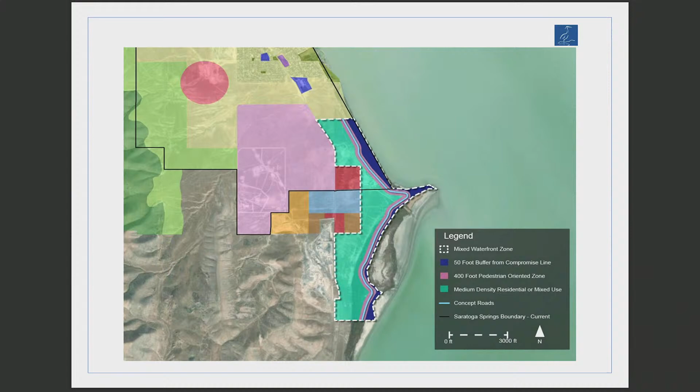So there's already a project that is kind of — but they came in before these new standards, yeah. This is not the design standard, this is a change. But they have the commercial on the bottom and residential on top, which they met. Yeah, a lot of what they've done with the trails and the connections and incorporating the waterfront into the design — that's what we're after, and they did do a lot of that. The architecture on that building is a little different than what you'll see in this document. It's what we're trying to aim for, so. Okay.

So let's see here. Basically, some of the important characteristics are: we want to include neighborhood services, social gathering spaces, attractive landscaping, convenient public access to lakeshore areas, and a sense of personal safety, well-maintained housing, and attractive parks. On this slide here at the bottom, I wish we could zoom in on that — or maybe we can. Probably can, yeah.

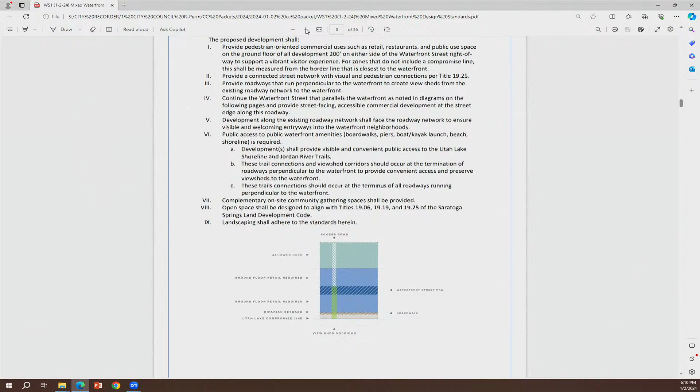That image gives you a good visual of what we're saying in all these words in this document. I'm a more visual person, so when I see an image like this, it's easier for me to understand.

The dark blue line in the middle is the waterfront street right-of-way, so that would be a road running through the development. Then the medium blue that sandwiches that dark blue is the required retail areas, so we'd want retail space along that road.

On the main road. And as you get closer, on the bottom of the screen, that's the waterfront. We envision some kind of a boardwalk, the lake shoreline, and then the riparian setback, which is the area we have to preserve along the waterfronts.

Up on the top of the image, that lighter blue or teal color, those are the allowed uses, so that would probably have housing or whatever in those areas. But the idea is we want to focus the commercial along a main artery and then have connections to the waterfront on the other side of that main artery.

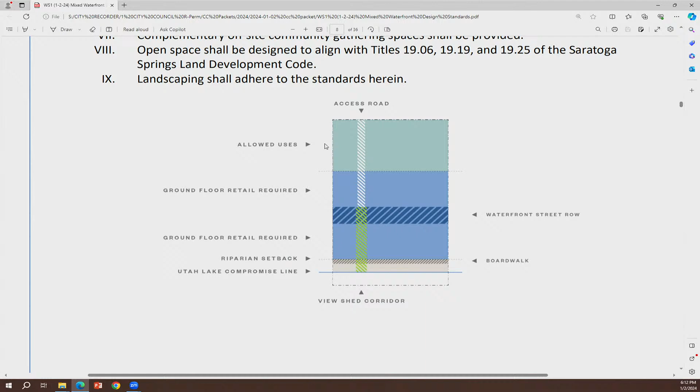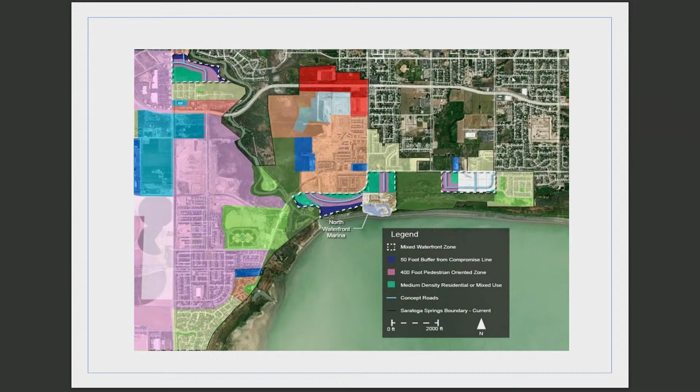Can we zoom back out again? One of the things, I don't know if we want to talk about it tonight or maybe just have it be something to think about. You can kind of see here in the middle of the screen, maybe we can zoom in, is we've kind of shown what the waterfront would look like.

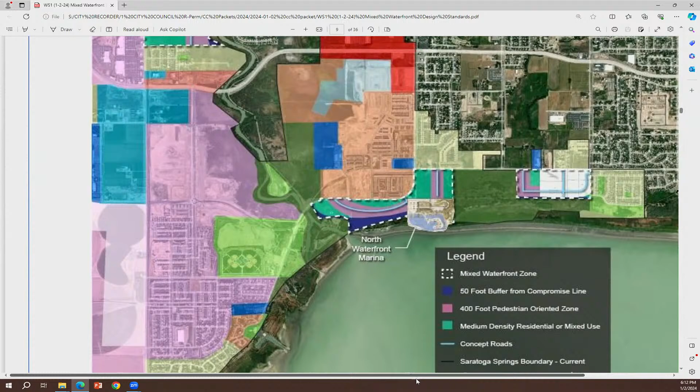This area is adjacent to the North Marina. So we want to plan, because that's what planners do, and we want to make sure that the marina integrates well with the mixed waterfront area. I wanted to show it to the council because we need some direction.

Do we want to have the marina completely separated from this zone? Do we want to try to integrate them? And if so, in what way does the council see us doing that? I personally would like to see the marina integrated into these two adjacent mixed waterfront zones. I'd like to see those zones support the marina use.

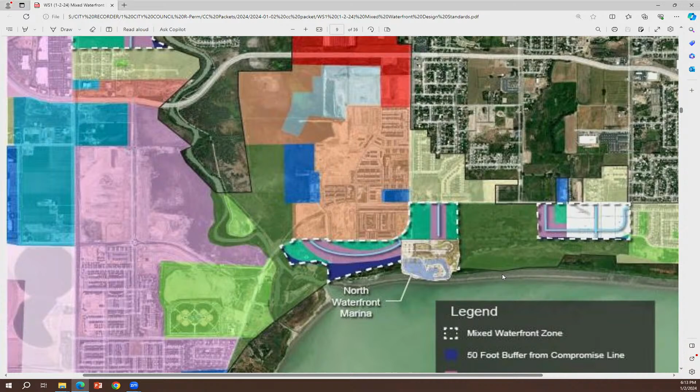One of the concerns we probably need to consider is that if we're integrating it, that's one thing, but if the developer is trying to count that open space for their open space requirements, it's probably not what we're looking for. So integrating it, I understand, but we want the policy very clearly set by the council as to whether or not they can then claim, hey, the city has a trail along the river, or the city's already built open space here.

We don't want that. So we need to be very cautious about the integration and how that works. Their application probably needs to stand on its own without counting city property for any of its requirements.

The other thing that's not addressed in this, and I appreciate Austin and what the planning team is working on, is we probably need to tweak some of the other waterfront policies as we're adopting this and integrating it in, so we can address some of the concerns that happened with some of our last mixed waterfront developments, so those issues are resolved prior to us having to work through it during the development process. So those are some changes we'd also be wanting to bring back along with this as we look at those code amendments and things of that nature.

So not integrated, but complementary. I wouldn't want our marina to be part of the mixed waterfront zone because we're not going to be meeting the requirements, we won't have the commercial that's necessary, and we're not going to be meeting maybe even some of the design standards. I really would like to just see it be, we have that civic zone now, just leave it there, and then it's not included in the waterfront, because obviously it's very waterfront friendly.

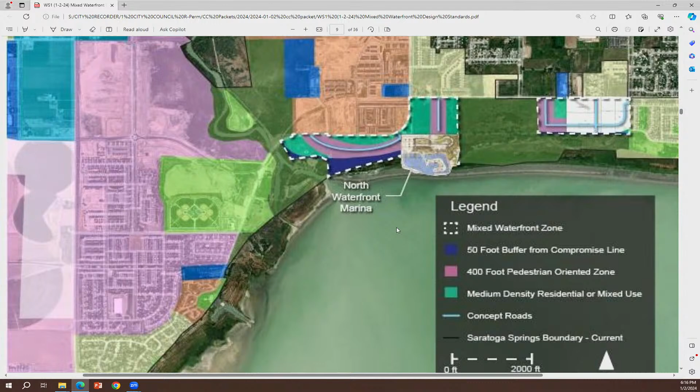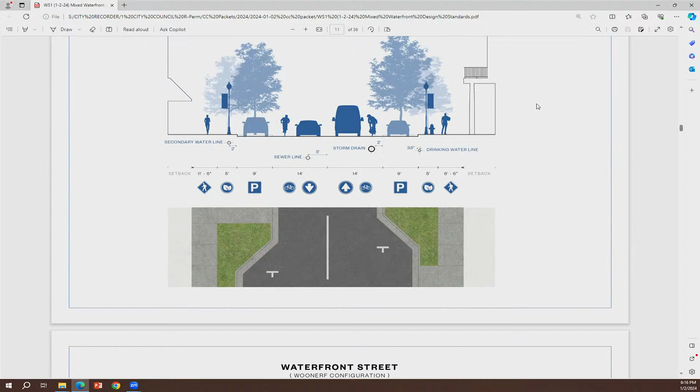On the second slide here, we have an alternative configuration. We do need to update this image, as it's showing pavers there. We actually don't want pavers. We're not envisioning that; that would be a lot of maintenance. So that image does need to be updated.

But this image is different. The way it differs from the other one is this one has curb and gutter, whereas this one is flatter, so someone could naturally cross. It'd make it more pedestrian friendly. It does have on-street parking, integrated, shown in that dark gray box there, a separate colored paver.

Those dark brown ones. Or the dark brown, sorry, yeah, I meant the dark brown. Yeah. I apologize. That's okay.

So the idea is, let's say someone with a stroller, they could just roll it right across. They don't have to worry about hitting the curb or whatever. It creates a more pedestrian flowing environment. And so those are the street cross sections that we figured would work well in the mixed waterfront zone.

Did you take into consideration on those pedestrian ones where you're putting cement flower boxes and stuff that protects people at crosswalks? Even though you can still cross anywhere, just to create a visual effect, we need a standard in there that helps drivers know we're coming up on a common cross section, even though it can be crossed.

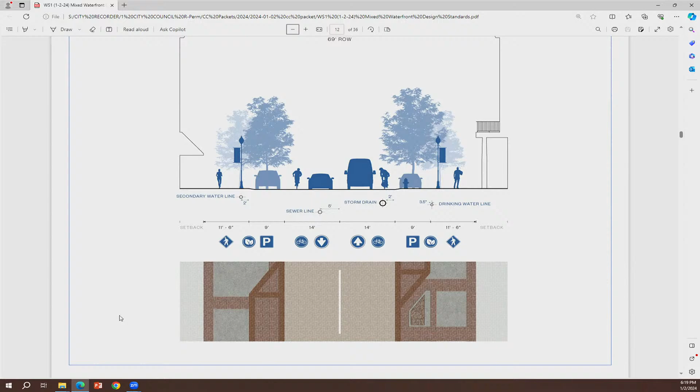Okay, all right, good feedback. And I'm taking notes of this as we go through.

Okay, so now we're getting into the meat of it here. So these are the building design standards.

One of the main focuses we wanted to have on this project was we wanted the buildings to be unique. We wanted them to feel like you're in a waterfront area. So a lot of these architectural elements, we looked at examples of other notable waterfront communities around the country.

We thought, well, what is it that makes something waterfront? That's really what we've strived for here. One of the things is we want buildings to have 3 distinct elements: a base, middle, and a cap. Kind of think of a wedding cake - you have the base, the middle part, and then the topper on top. That's what we envisioned the buildings to look like. The base would be the ground level where people are interacting.

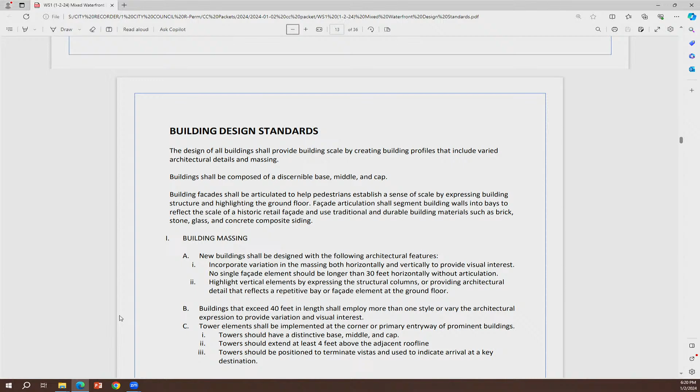You're going to have lots of visibility, 35% transparency on that base floor. Let me go to the image here so you can get an idea of what we're talking about with the 3 different elements. You can see how the top of the building, the cap, is different, and how each level is distinguished from one another - the middle is the middle, the top is the top, the bottom is the bottom, with a clear distinction between each.

You'll notice there's a lot of variation going on in the building - articulation both vertically and horizontally, using things like columns, indented windows, capstones, and things like that. Those elements help break it up, give it some variety, and keep it unique.

Did I miss it? Is it a 360 requirement, or just the facing of the waterfront? Do we require decent design on the back part, because there's the water side and then the part everyone sees - four-sided architecture? Yeah, so this would still be bound by our standard city code, which does say we have to have 4-sided architecture, though less on the back side than the front side.

Right, we haven't addressed that, but we certainly can. Because we really need this - in this situation, you have everyone coming in, so the land side needs to look nice. It can't look like the back of Smith's. I'm not trying to pick on Smith - Smith did a nice job, but it's much simpler in the back, right?

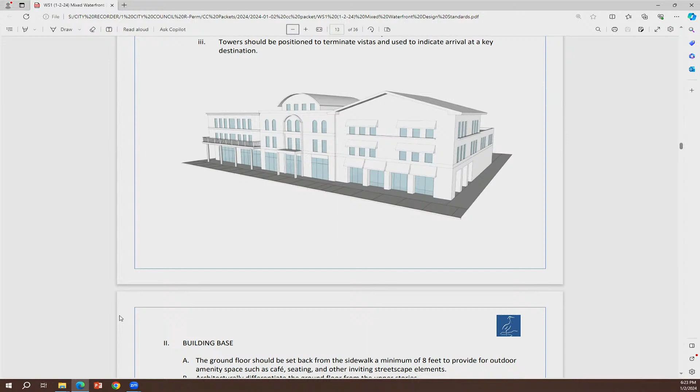At this point we haven't made that clear, so we can definitely add it. When we were creating this document, we envisioned at least 2 distinct sides - the streetscape where people are walking with shop fronts, but then as they're walking along the waterfront, that's a separate, unique area that also deserves as much attention, since you're walking from the street to the boardwalk. So really all 4 sides need it.

Yeah, absolutely. Okay, so that gets you the building base. You'll want to upgrade your images too, because if you look at them, you have awnings and things on one side, and then look at the other side of the building. That's a great point, thank you. Yeah, we've been updating these images several times already, so this will give us an opportunity.

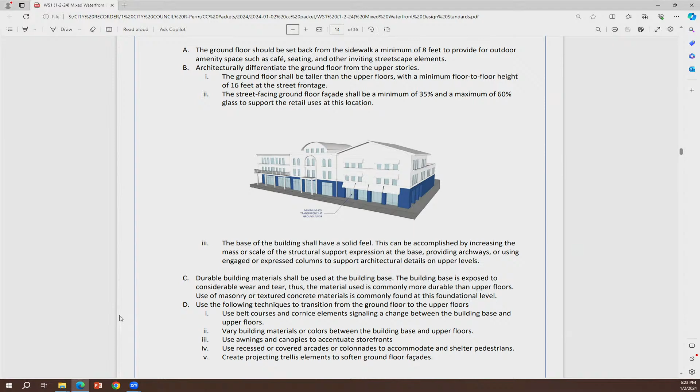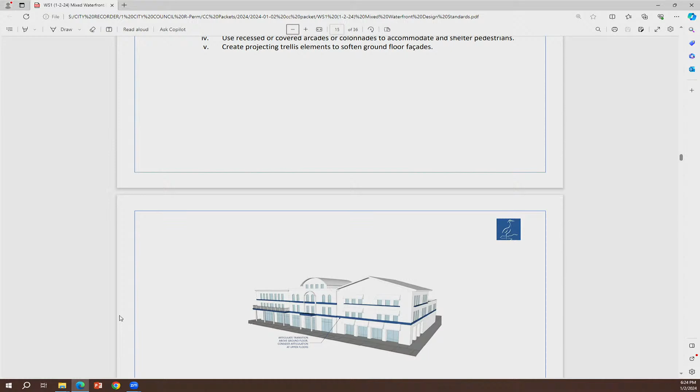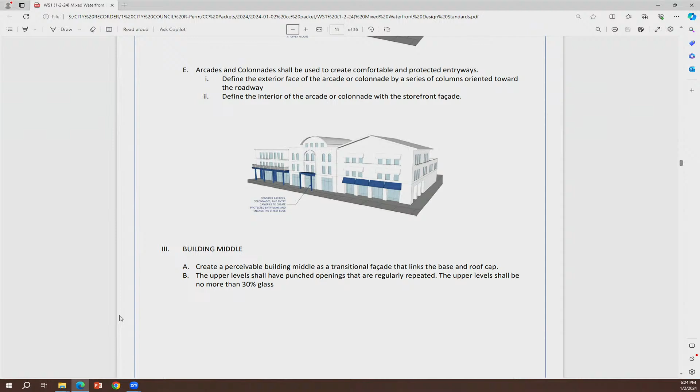On the next image here, you can see how it highlights the transitions between the different levels, the articulation between the different levels - you can see those dark lines there. This image is emphasizing the arcades and colonnades. Think of a waterfront community with arcades and colonnades - not that we're going to do that exact architecture, but think New Orleans, the old town, when you're walking down and they have those pillars and little arcades where you can walk and dine out. It creates that sense of space for people to be in that area. This is a more modern take on that, you could say.

Then we have the upper floors. This image is showing that we have a max 30% transparency for the upper floors.

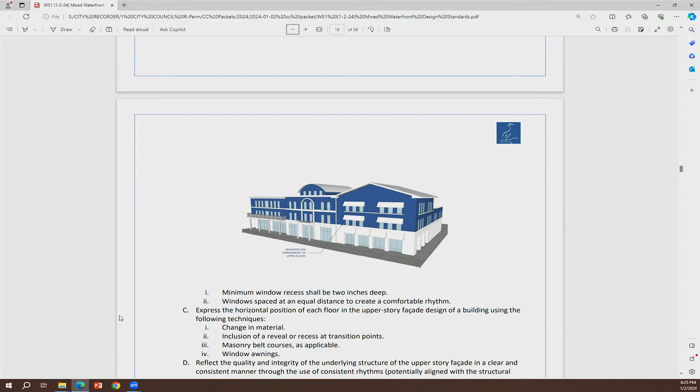Can we talk about the roofs? Yeah, so this proposal does allow for flat roofs with the requirement that at least 25% cannot be a flat roof. We do want your feedback on that. What you're seeing in this image is one way to accomplish that, but there could obviously be multiple ways.

How much percentage did you say? 25% cannot be, or can be? It has to be a pitch, so only 25%—75% can be flat. That's what we have proposed. 75% flat? Why? What's driving that number, why so much? Architecturally, why take that approach?

Maybe Whitney could speak to that. There are a number of reasons why you may want to allow flexibility for flat roofs. Some might be functionality. The other thing we looked at was the Mediterranean and waterfront architecture influencing this. Variation in roof lines also helps create a more diverse and visually interesting streetscape, so we wanted to provide for that. This image has a domed roof, a pitched roof, and a flat roof. We talked about highlighting corners by putting pitched roofs in those corner elements, perhaps in a tower, to allow architectural freedom and diversity within the roofscape.

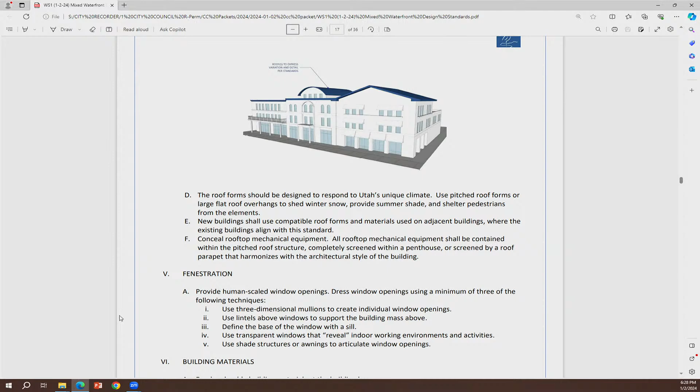Just a point of clarification—I see where you're going with this, but what if they wanted to have a restaurant terrace? Could they go more than 50% if it's a restaurant terrace?

Well, the restaurant terrace—they're not going to want the whole thing open anyway. They'll have it enclosed with just the porch out front, so I think it could still have that roof, but I wouldn't want to see it more than 50%. That would be the only consideration. Let's say it was just going to be public meeting space, or seating, or something like that.

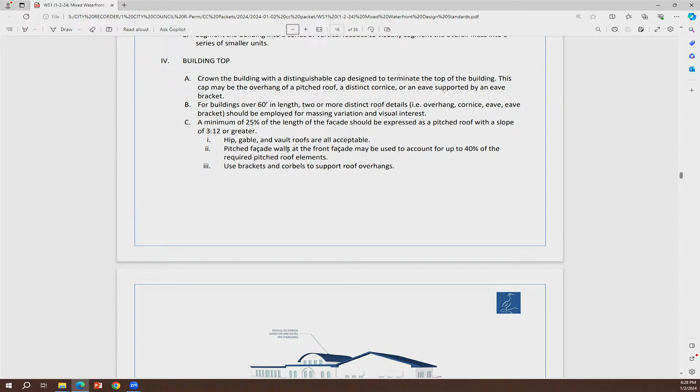But would there be exceptions that you would be willing to consider? I would. I wouldn't want to go to 50 for me personally, but I'm one of 5.

We do, and I would like to point out some of the other language specific to roofs. We say 25% of the length of the facade should be expressed in a pitched roof, 3:12 or greater. But we also say pitched facade walls, meaning the wall has a pitch but the roof behind it is flat, so you still get a roof variation change. That may be used to account for up to 40% of the required pitched roof element.

So what that is saying specifically is that the wall element would be pitched, not necessarily every part of the roof. I think we could incorporate a combination of those things, if that's something that you would prefer.

I would like to not have it 3:12 or greater, but have a max instead, so you don't get the super 45-degree European angle. There's a place for that, but not on our wall. What percentage would we say? We'll look at a couple of different diagrams, but we may want to max it out at 6:12 to your point. 50%? Yeah, exactly, that would be a good maximum.

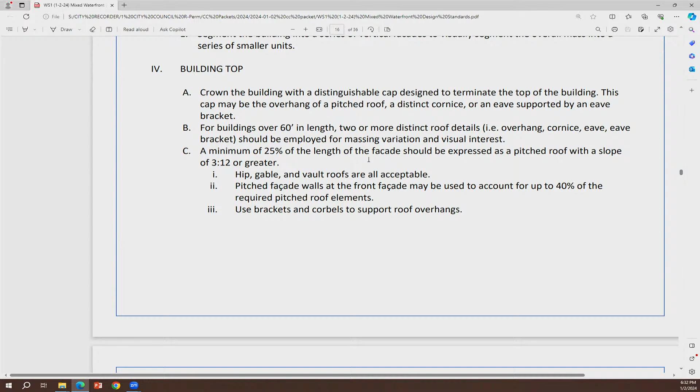Smith's is about 100 feet, over 100. 60 is like a Home Depot or Hobby Lobby size. I think Hobby Lobby was like 75 maybe. Okay, that's good, I like that. I always have to picture in my mind what those might look like.

We wanted to have pictures for you for the discussion. So obviously, as you're saying, this image is more than 25% - even just this piece here is more than 25%. So with what we just outlined, let's make the images match, and even put in some trees.

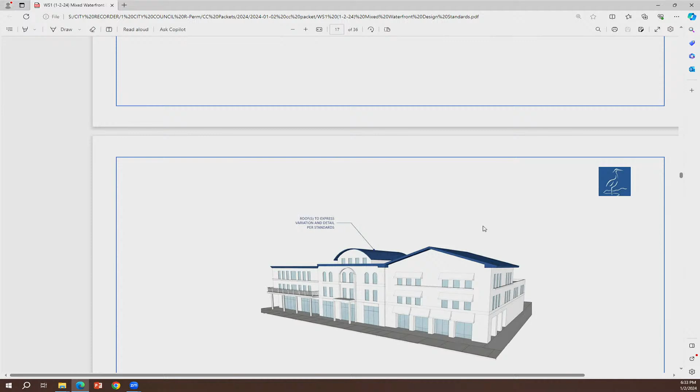Stick figures would be cool for them to see, like we're encouraging you to have a garden up there. I'd love a good rooftop garden. I'll add that all day.

Then to Wilden's point, they can do lighting, heating elements, heating structures, fire pits, things like that. You could have a heated roof deck so you don't have to shovel the snow. The fake pitch could act as shielding for your other stuff too, like your air conditioning units.

Do you have a max on the fake pitch? How much can they do, percentage on the facade? Is that a concern at all? I wouldn't want it to be 100%, because then you'd end up with all these weird little things around the front. For me, as long as visually, from any angle seen from the ground, you can't tell that it's fake, like at Disney it looks like a full building.

But everyone knows when you're on Main Street at Disney it's literally just the very front, and there are big cement boxes behind it.

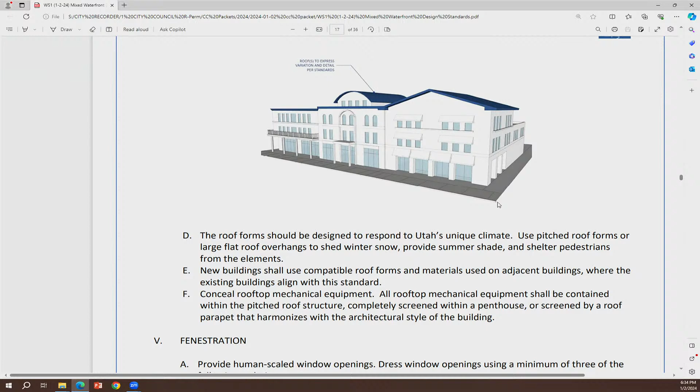I think we may want to look at this in two parts: one is the percentage of the front facade that expresses a pitch versus the percentage of the total roof area as seen from above. Let the experts give you the percentages and we'll look at that. I think she's hearing our vision, that sounds great. We just wanted more direction on that, so that's great, we can fine tune it.

Okay, I think that covers mostly the roof elements. We do have building elements that we've focused in on.

Some of the materials encouraged in this area are concrete poured in place or precast, concrete with light-colored aggregate, brick masonry, stone veneer, composite concrete siding, and metal as detail elements. That's the material palette we've envisioned. The idea is we want durable building materials that help distinguish these buildings, make it a unique area, and add texture and color to the building.

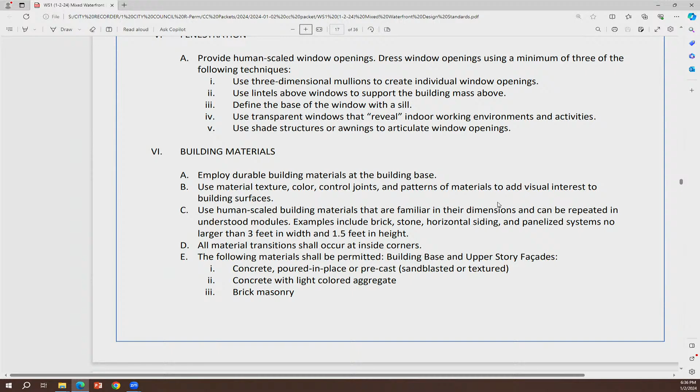Brick and stone are great examples of that. We're also going to avoid excessive variety of facade materials, so not too much excess. It's good to have those elements, but we don't want to overdo it. Glass is required to have a minimum visible light transmittance of 65%, so you can't create something with no visibility, like we have in our city all over the place, so we're going to try and avoid that.

Another key part is the elements we do not want to permit. In the mixed waterfront zone we don't want boxy and monotonous facades, weak or token expressions of structure, meaning inconsistent statements of structure, flush building surfaces, extensive flat flush surfaces, large featureless building surfaces, or highly reflective surfaces.

So a question I'd pose to the council is something we've experienced working on our city hall design—some of these concepts have come up and we found them a bit challenging. As you consider restricting reflective surfaces and similar things in this zone, think about whether that would carry over to other zones of the community, or be exclusive to this one. Just thoughts to consider.

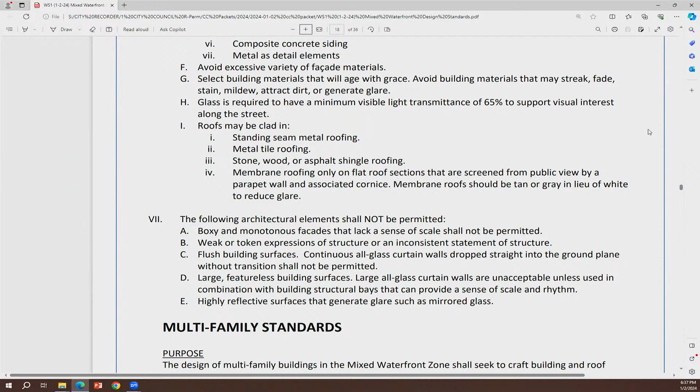Okay, that's the overall architectural theme of the area, but in the next section we zero in on multifamily standards. I thought this was good—the idea is to make sure an all-commercial building is treated a bit differently than one with multifamily.

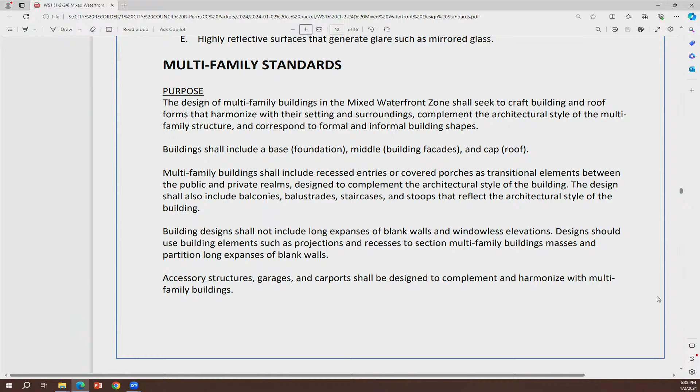Some key highlights: multifamily buildings shall include recessed entries or covered porches. The design shall also include balconies, balustrades, staircases, and stoops. The building design shall not include long expanses of blank walls or windowless elevations. Accessory structures shall be designed to complement and harmonize with the buildings.

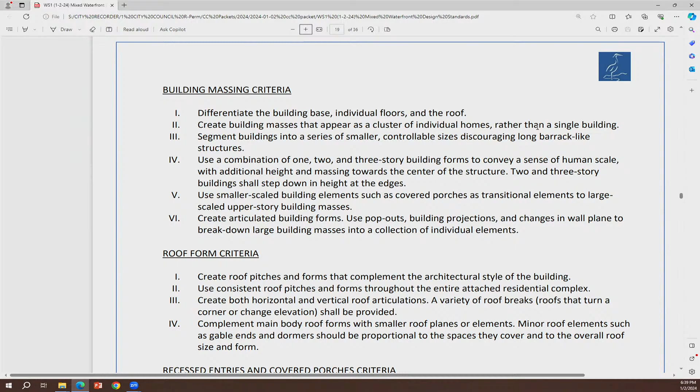Decks, we do want decks to be a part of this. In some of our research, we're thinking that decks really do give that waterfront feel, and so that is a requirement. However, the deck should not appear as if they have been tacked on as an afterthought. It's to be well integrated into the design.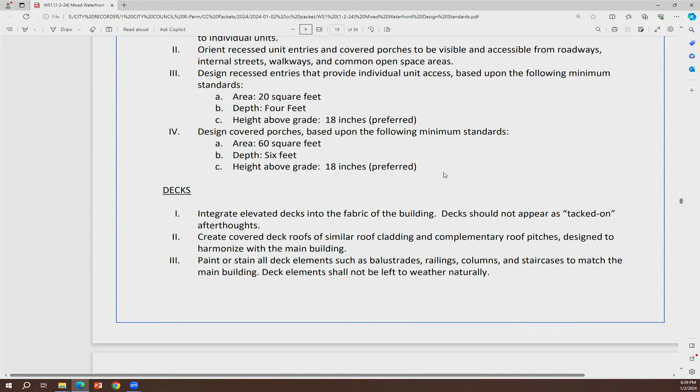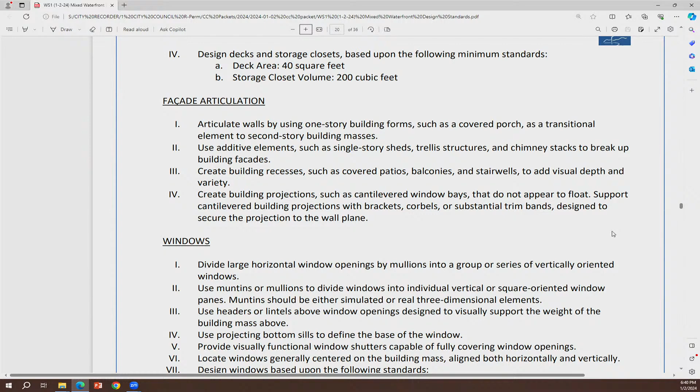Then we talk about the articulation of the facade, just breaking it up. Windows: large horizontal window openings divided by mullions into a group or series of vertically oriented windows. There's some more architectural language here that, unless you want to go into it, I won't get into. I think this section was really well done.

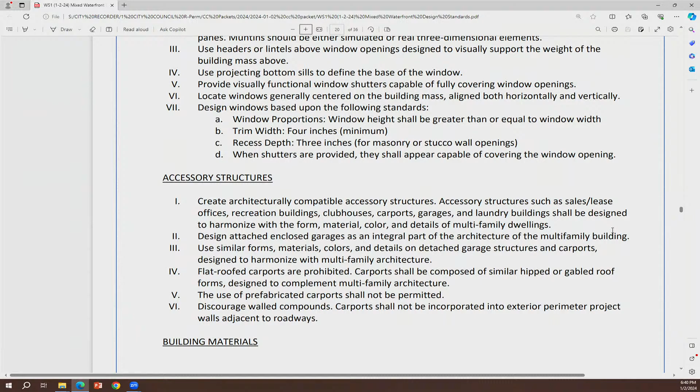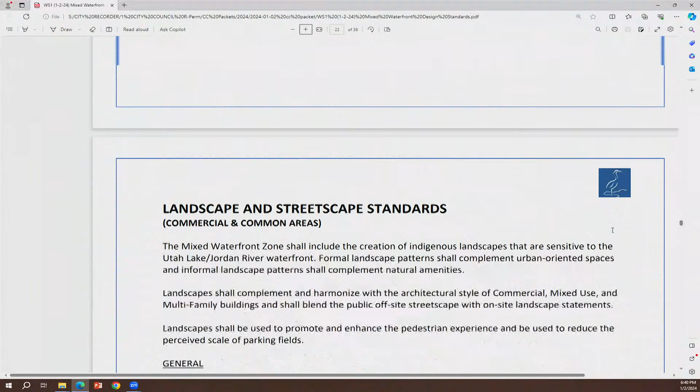Thank you. And then we have a section that really focuses in on the accessory structures that I mentioned earlier. After this, let's see... okay, so we have this section here that talks about landscaping and streetscaping.

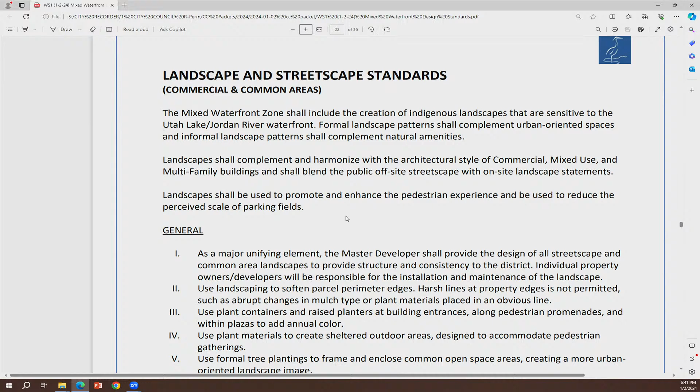Obviously, we want the landscaping to be done and integrated. Some of the ideas are we want the landscaping to be used to soften the parcel perimeters, so the perimeters of the property should have plantings. We envision having plant containers and raised planters at building entrances to create a nice entry into the buildings, and sheltered outdoor areas using plants, providing shade with natural plantings.

On sidewalk dining - yeah, so that's actually like a canopy. We emphasize a wider sidewalk along that right-of-way so they can provide covered outdoor dining areas. You could have the dining come out, with pillars, kind of back but still giving a true boardwalk kind of feel.

An interesting element that we put in is to have soldier rows of trees to define the internal streets, going along the main street there - the same tree creating that feel along, and also along the promenades, that same type of planting.

One of the things here also is hanging planters from pedestrian light fixtures. That could also help give a little life to the area.

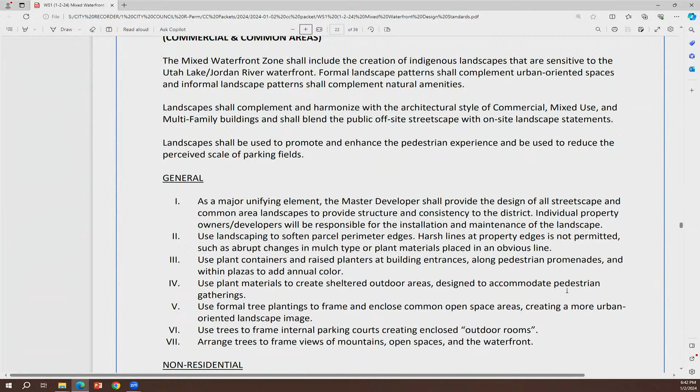One of the things we want to do in this area is create a unique feel to it. One way is to have the lighting, the seating, the trash receptacles, maybe the tree grates and the bike racks all uniformly integrated - the same color, maybe a logo, a theme for that area on each of those elements, to create a sense of place for the waterfront.

Do we have in the code - that's one of my notes - the lighting, the street lights. We have pretty strict rules for public streets because we want consistency, but I think we need to be a little more flexible as a council, so we don't have the big bright lights like in the Smith's parking area. Even like a Gaslight District feel, along the boardwalk you could have the fake flame ones, so the lighting is a little unique to the area, because if you have big bright lights you defeat the whole purpose of being waterfront, since all you're going to see is light.

You won't even see the lake. Mosquitoes will all come, they'll definitely need to be yellow, like a yellow light. So if we can just make sure that, and then even if we need to change our code.

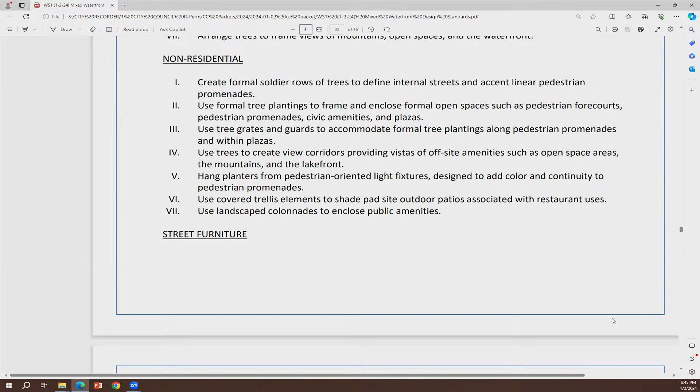Perfect. Okay, great, thank you. So let's see here, let me just get to the right page, okay.

Another element of this is the Utah Lake Shoreline Trail and the Jordan River Trail standards. We have a section where we talk about a promenade - a big, open, pedestrian-oriented area along the waterfront, broken into two parts. The part closer to the water is maybe more focused on waterfront activities, while the second part would be more focused on biking, walking, or gathering spaces. Those are the two elements that would be part of the promenade.

Also, maybe that could be an area where we could have public art, if that's something we're interested in. That would create an interesting place to walk, and you could look at the artwork and things like that.

Let's see here. On these trails you're talking about, do we have dedicated bike lanes, or are they just mixed use? They're mixed use - our standard trail, we don't have any that have a dedicated bike lane. Is that something you want us to look at? Not if we don't have it in other places - I don't want to call it out. Because then you'd have bike lane, no bike lane - that doesn't make sense.

That would freak people out. I think we have some standards with signs, like in different places I've even seen them where it says this is a shared... they're multi-use, like you mentioned.

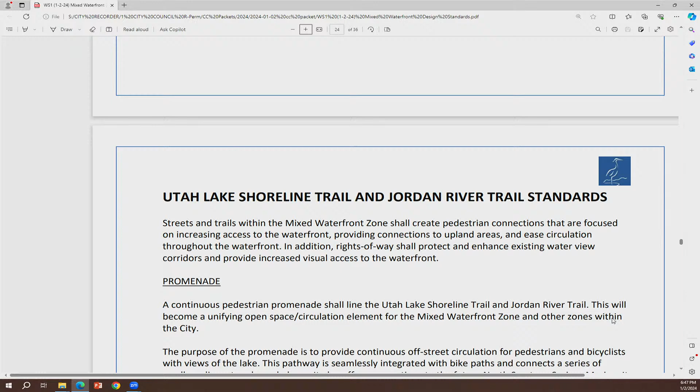There shall be guardrails along areas that might have a drop-off or something like that. There shall be seating elements, including such as benches, seat walls,

or stairs. There should also be furnishings such as benches and waste receptacles. So in the rest of our code, do we have in seat walls where you have to have the little bumper to make sure that they can't skateboard it? Because I don't think we allow seat walls in the other zones. Maybe we do, but we need to make sure it's clear that they need to put the little knob so that you don't have the skateboarders waxing it. I could not think of the word, thank you. Okay, we can add that. Yeah, because I like the wall idea. It makes it feel more natural. It's more like encompassing to the lake. It's not so artificial.

And then integrating pedestrian lighting into the design of the promenade. So that probably goes along with what we were discussing. So we really want that pedestrian lighting rather than car or vehicular lighting. That pretty much wraps up our document, so Councilman Willden has a comment.

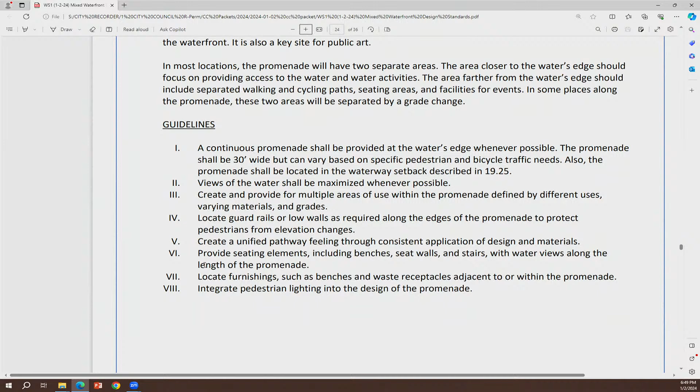I had one item, at least in our packet - my screen just went blank. It was on page 25 where we had a list of different zones and what were permitted, and the one thing we're putting in mixed waterfront - do you have that? Let's see, probably this table here. I mean, the one thing you're adding in there is transit-oriented development.

I know why you're doing that, but I'm really uncomfortable with specifically identifying that because the state is going to control it. They're already controlling it, they're going to control it more. And next thing we know, a developer comes in saying it's transit oriented, UDOT requires 50,000 apartment buildings, you've got to put it here. So I know what we're trying to do, but I would prefer it not be referenced in that so we don't get tied into state code and UDOT standards.

I think that's not UDOT, UTA. And I like this walkable concept. I don't want to see them try and push tracks through here because they're trying to take it across the top of Utah Lake Freeway. Because I guarantee as soon as we identify that - the state, Mark, every year it seems like they're adding new things. I've talked to our counterparts in Springville and UTA is just pushing all this stuff. The state's agreeing to it - huge amounts of density, probably more than we'd ever want here.

So I'd prefer we don't specifically identify this to keep it out of the state so we can control the density. I think we could use language to say, make it pedestrian friendly - pedestrian friendly that perhaps a bus would come down, but just don't use the state's TOD terminology. We don't want tracks running down this. Okay, yeah, so that table we can definitely do that, but it would have to be a code amendment because that's actually in the code, so we can come back with that. Because we're going to do some other code tweaks, so we can throw that in with the other ones. Great, thanks. Good catch.

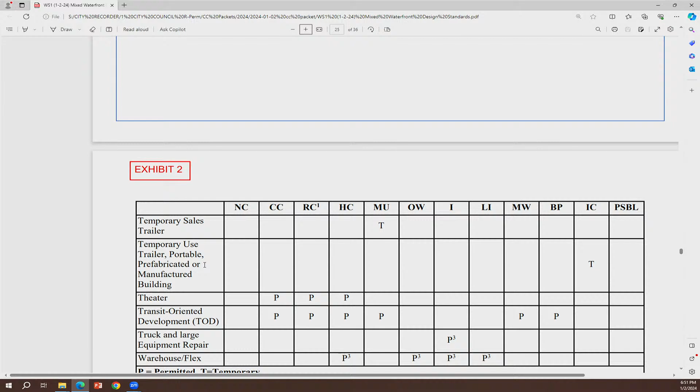Mayor and council, I think we're going to take a mulligan. And since we went a little bit longer in this work session, we'll postpone this until the retreat and we'll just spend some time at the offsite discussing the items we had queued up for this evening. So if you're okay with that - as long as you make sure we have an hour-long discussion on gravity-fed sewer lines, it would be my pleasure. That was two years ago, right? Okay, want a demonstration of that?